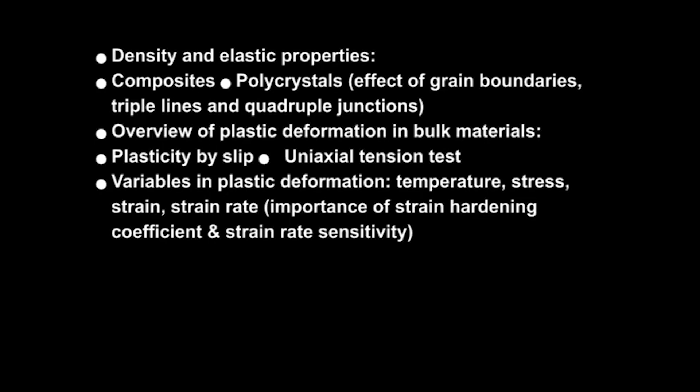In the discussion of mechanical behavior of materials, we will take up an overview of some of the properties, how they arise, the mechanisms behind these properties, and further we will try to discuss how these properties change when we go from the bulk to nanomaterials or nanostructured materials.

We will also take up issues regarding artifacts in testing, artifacts in the properties which we observe, and try to describe how we can develop better strategies of testing materials and also coming up with properties which are specifically peculiar to nanomaterials. Some of the properties we will be talking about are elastic properties, plasticity.

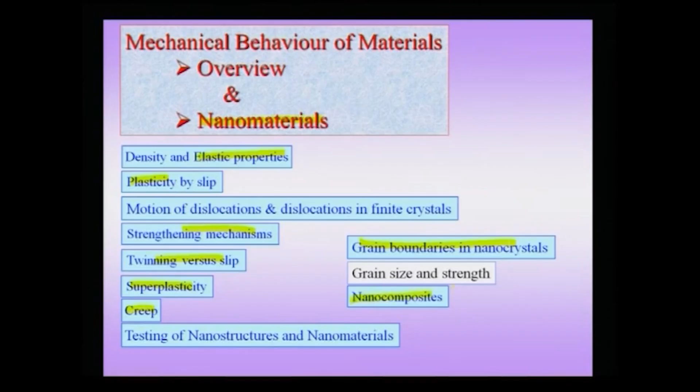We will also talk about strengthening mechanisms, the switchover from twinning to slip, important properties like superplasticity and creep in nanomaterials, and also the role of grain boundaries in nanostructured materials. In the whole process, we will also take up some hybrids like nanocomposites, which are a lot of research is being conducted in these areas nowadays.

So we will alternate between the basic property in bulk materials, the description of the property, and then take up specific properties of nanomaterials. Now, it is important to start with a broad overview of mechanisms by which a material can fail.

This can be mechanisms which are physical, there can be electrochemical, or they could have other origins from which failure can occur.

In this context, failure has been defined as a change in the desired performance, which could involve changes in properties and or shape. As we know, if there is a component like a gear wheel which is meshing into a system with other gears, then if there is a change in the shape of the gear, automatically this is constituted as failure.

Often elastic deformation is not included in failure, but it is obvious that suppose I have a springboard from which a diver is going to take a dive into a pool. If the springboard deflects too much, even though this would come under the class of elastic deformation, needless to say this would be a failure of the desired performance, and therefore it would constitute failure by elastic deformation.

The common other methods of failure would consist of plastic deformation, in which slip is one of the important mechanisms of plastic deformation, fracture wherein cracks propagate in the material leading to failure. Fatigue could be one of the reasons behind such a failure, and fatigue could also lead to cracking in the material. There is creep, and we will see that there are many creep mechanisms which can actually lead to failure.

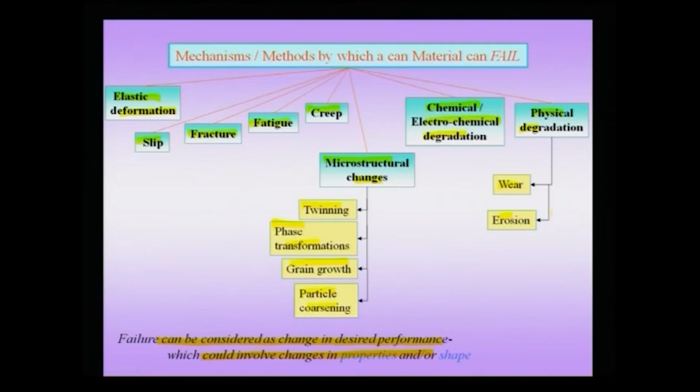Physical degradation like wear and erosion can also lead to failure, and this would be very important when you have two components in contact like the gear wheel, wherein surface wear could be an important property which we need to take into account. Suppose you are talking about a blade operating underwater which is propelling a ship, then erosion from particles in the medium could be a serious issue, and therefore that also needs to be protected against.

Having got a broad overview of the mechanisms by which a material can actually fail, we will take up some of these during the course of these lectures, wherein we will see how some of these properties have a beneficial effect when we go to the nanoscale, and therefore we can actually improve the properties when we work in nanostructured materials. Parallelly, we will also highlight some of the problems in using nanostructured materials, and therefore, putting together these problems and the advantages, we design strategies for improving the performance of materials and components.

The first property we take up is a physical property, which is density, but we take this up because this is closely related to some of the mechanical properties like the elastic properties.

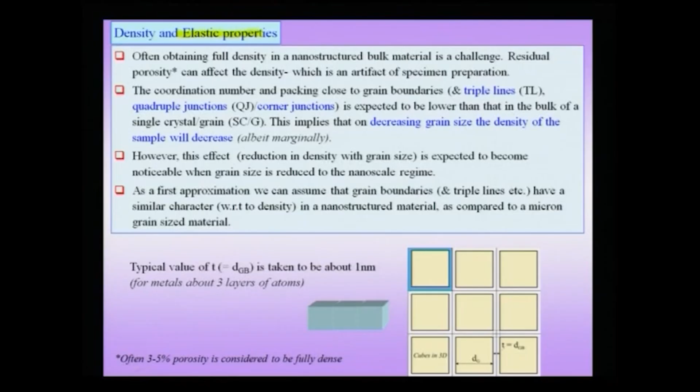Now, suppose I am taking a bulk material, then the fraction of grain boundaries in such a material and the fraction of what you might call triple lines is very small, and therefore, we can ignore them in terms of the overall contribution to the elastic properties. Of course, we cannot ignore grain boundaries when we are talking about plastic properties, and we will take up those important contributions later, but as far as elastic properties go, we can often ignore the grain boundary contribution.

The problem with nanostructured bulk material is a challenge, because often full density or close to the theoretical density cannot be obtained, and residual porosity can affect the density. So, in our arguments we always have to keep in mind that when talking about density of nanostructured materials, there could be an issue of porosity, and this porosity could drastically affect the properties, one of them being the elastic properties. And we would like to get rid of this artifact which is coming from the specimen processing or preparation.

Now, before we take up the elastic properties of a nanocrystal, it is important to note what is a grain, what is a grain boundary, and what are the higher order entities in a grain structure. Now, I can visualize that of course, you have a single crystal, then you have only one defect in the material, which is a surface.

Suppose I have a multiple grain material and I draw it schematically here, then I can notice that each one of these is a grain, and one grain can be differentiated from another. So, this is grain 1 and this is grain 2, one grain can be differentiated from another by the orientation difference across the grain boundary. Let me highlight the grain boundary by red lines.

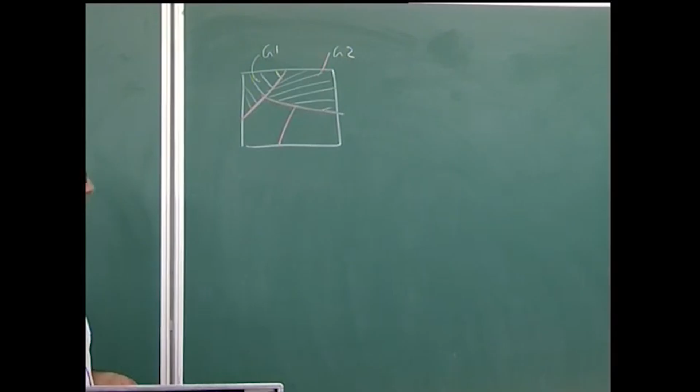Now, apart from these grain boundaries, there are higher order terms here, or higher order structural entities, like this, which you might call a triple line. So, in 2 dimensions of course, it looks like a point, but in the 3rd dimension this is a line, and therefore, this is a triple line.

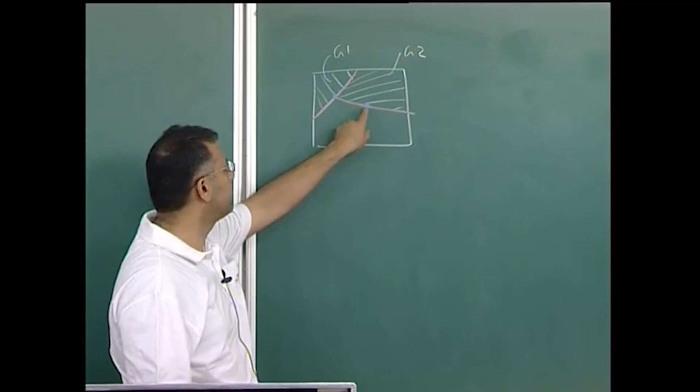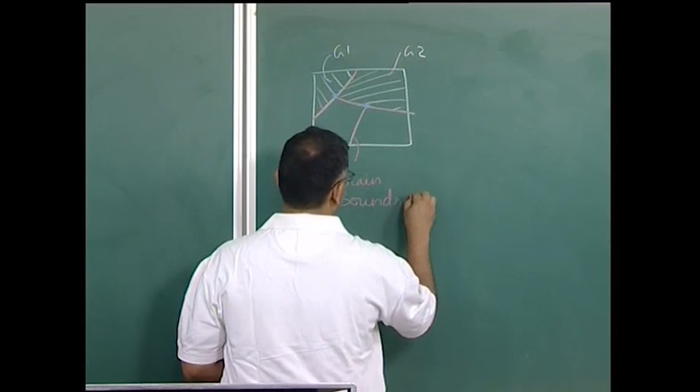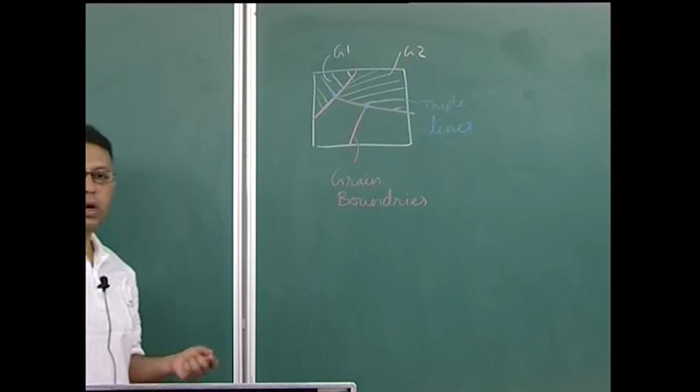So, you have grain boundaries and triple lines. Further, you can also conjecture that if 4 grains are meeting at a point, then that would constitute a quadruple junction.

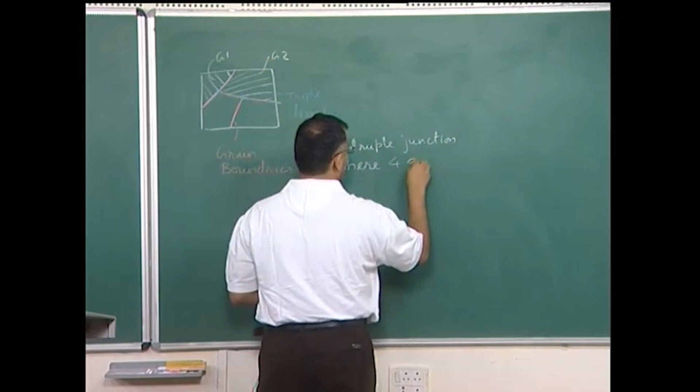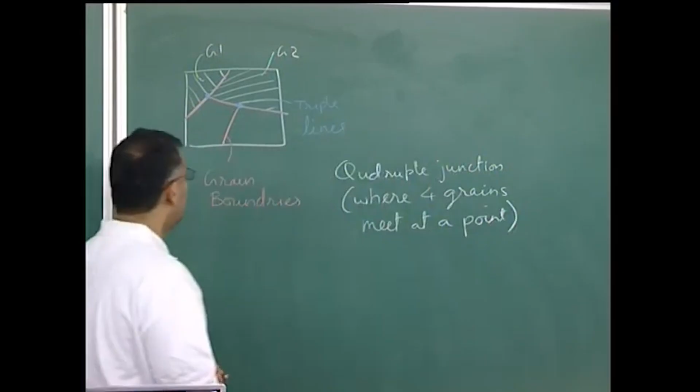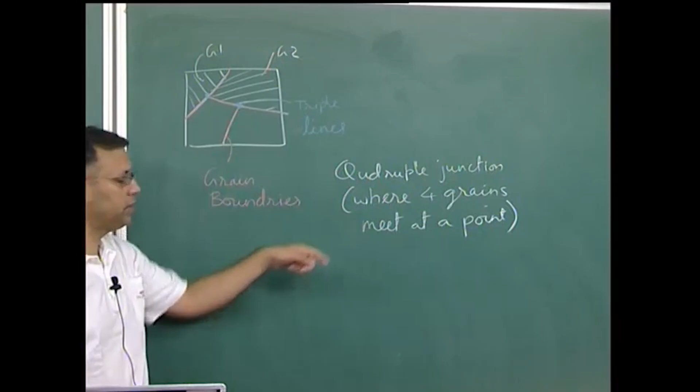And in terms of the energy and bonding, you can think of the grain interior being of the lowest energy, the grain boundary being of a little higher energy, the triple lines being of even higher energy, and finally, quadruple junctions being of the highest energy.

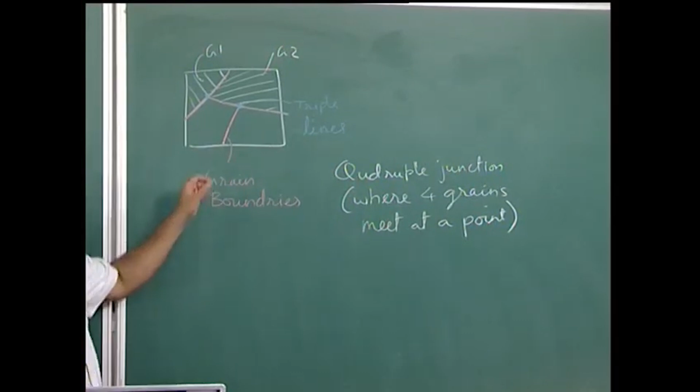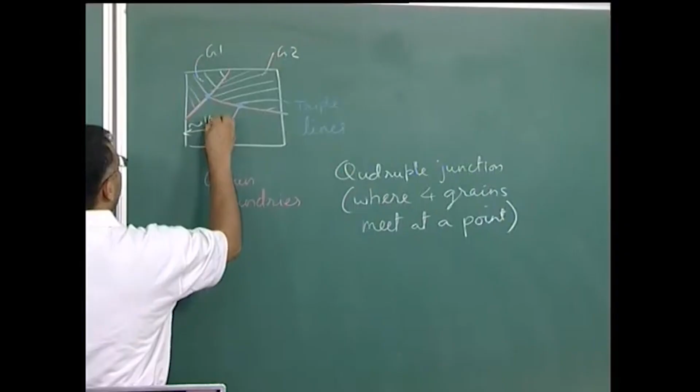If you take a bulk material, then the volume fraction of each one of them is going to be small and it can be ignored. But in a nanostructured material, when I am talking about a bulk nanostructured material, it means that the grain size is of the order of nanometers, say for instance 10 to 100 nanometers, and therefore in such a material, the effect of these on the density and elastic properties cannot be ignored.

Obviously, needless to say, their effect on plastic properties and fracture and other behavior also cannot be ignored.

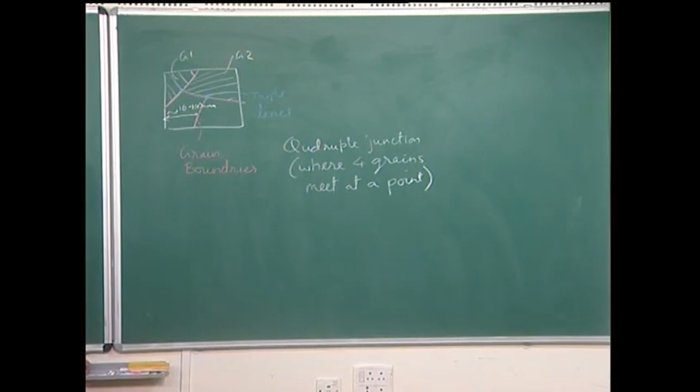Therefore, let us see how these entities affect density. The coordination number and packing close to the grain boundaries, which also includes triple lines, short formed as TL, and quadruple junctions, the QJs, which in literature are also called corner junctions, is expected to be lower than the bulk, or if you compare it to the single crystal. This implies that on decreasing the grain size, the density of the sample will decrease.

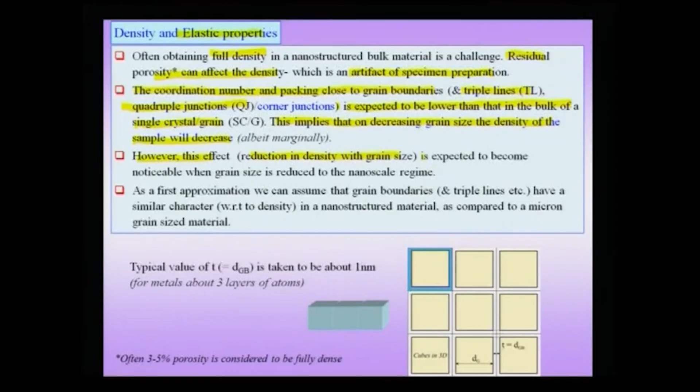Though this effect is expected to be marginal, not drastic, nevertheless, when you decrease the grain size, in other words increase the amount of grain boundaries and triple lines per unit volume, then you expect that the density would actually decrease for a polycrystalline nanostructured material. However, this reduction in density with grain size is expected to become noticeable only when the grain size is reduced to the nanoscale regime, and this is an important effect which shows its prominence only when you go to the nanoscale regime, as we shall see shortly.

Now, how to understand the effect of these? The way to understand is that we assume a certain grain morphology, and from that grain morphology we can assume that there is a distribution of triple lines and quadruple junctions, and we can therefore calculate the density based on the distribution of these.

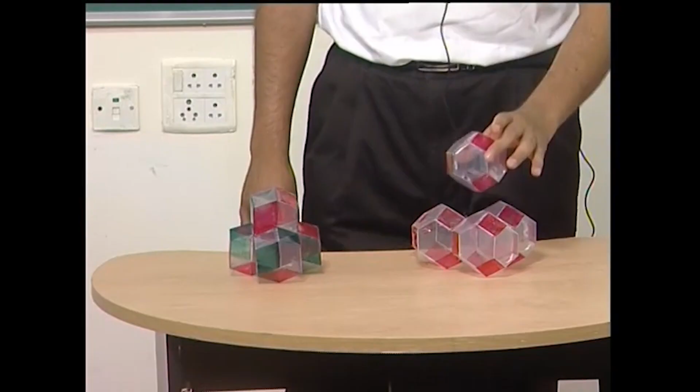One of the most common ways of understanding grain structure and grain boundaries, the way it is modeled, is to assume models of the form which I am showing here. You can see there are two kinds of standard packings of grain structures which are used. This is using something known as the tetrakaidecahedron, sometimes also referred to as Kelvin's tetrakaidecahedron, which is a space filling solid, and here I have something known as the rhombic dodecahedron, which is also a space filling solid.

Now, you can see how these rhombic dodecahedron and tetrakaidecahedron can monohedrally tile space, using just a single shape that can fill space. The reason for using these shapes is that this is mathematically easier to model, meaning I have a single shape and I can use the entire crystal, or the polycrystal, to be made of grains of this shape.

The difference in choice comes because this solid, even though it is a preferred choice for a grain structure, some people also prefer the rhombic dodecahedron because every face has an identical shape, which is a rhombus. In the tetrakaidecahedron case, there are two types of faces, a hexagonal face and a square face. Therefore, there are two choices classically used for modeling grains and calculating effective entities from grain boundaries and the mechanical behavior of grains.

But in the calculations, as we shall show now, we will use a different kind of shape for a grain, and this shape we are going to use is a cube. The reason for us to use a cube is to make it mathematically simple to actually calculate the various quantities which we are interested in.

As a first approximation, we shall assume that the grain boundaries have a similar character in nanostructured material. This is a very drastic assumption, but we will make the assumption that even though we are going to nanostructured material, the overall crystal structure of the grain boundary, the grain boundary widths, etc., remain very comparable or very similar to that in a micron size material.

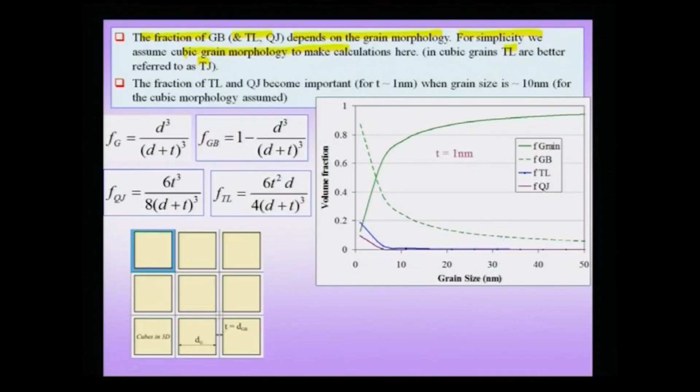The fraction of grain boundaries, triple lines, and quadruple junctions depends on the grain morphology. For simplicity, we have assumed a cube morphology to make our calculations very simple, and in cube grains, triple lines can also be referred to as triple junctions, as often done in literature. The fraction of triple lines and quadruple junctions becomes important when the thickness is about 1 nanometer, when the grain size is of the order of 10 nanometer or below, which we shall see very soon from the plots and the way we make the calculation.

The fraction of grains as a function of the size of the grain, shown here as d, and the size of the grain boundary, T, can be written as d cubed divided by (d plus T) the whole cubed. This is a pure geometrical calculation based on the cube morphology. Fraction of the grain boundary region can be written as d cubed over (d plus T) the whole cubed, 1 minus this value. Fraction of quadruple junctions can be given as 6T cubed divided by 8 into (d plus T) the whole cubed. The fraction of triple lines can be given as 6T squared d divided by 4 into (d plus T) the whole cubed.

Therefore, I have definite formulae for the fraction of the grains, the grain boundaries, the quadruple junctions, and the triple lines. If I plot these functions as a function of the grain size, you would notice that this main function, the fraction of the grain, seems to reduce as you go down to smaller and smaller grain size. So that means if the fraction of the grain is reducing, the remaining of the material is going to increase, which is now the fraction of the triple lines, the grain boundary, and quadruple junctions, which you can see are increasing.

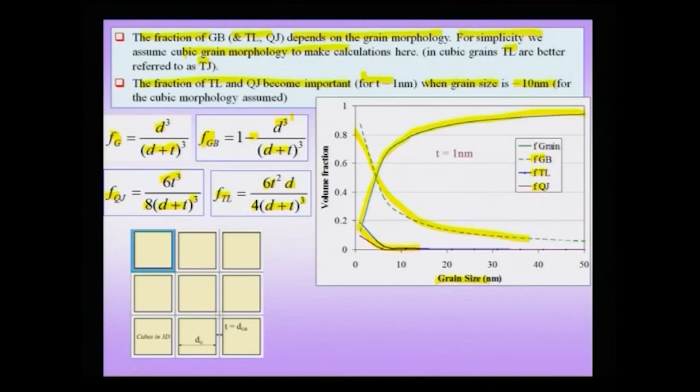The important point to note from this graph is that it is only below about 10 or 20 nanometers - I can draw some vertical lines around this 10 or 20 nanometer mark - that grain size effects start to dominate on these other entities of the crystal. That means if I am at a larger grain size, say about 50 nanometers, I can safely ignore the contribution of these to density, because the volume fraction is going to be small, so I can ignore them.

Now, what happens to these quantities when you are in the small grain size regime, which we already defined as less than about 20 nanometers? You notice that grain boundaries already start to play an important role when you are less than about 30 nanometers, while the importance of triple lines and quadruple junctions becomes very significant only when you are below about 10 nanometer. You can see that these functions start to dominate only in this regime. This is very important, because when you are talking about nanocrystalline materials with grains of about 10 nanometers, which are plastically deformed, you cannot anymore ignore the presence of triple lines and quadruple junctions, and they will play an important role in the plastic deformation of the material.

Before we reach that stage, we will of course talk about the elastic deformation of materials with these kinds of entities in them.

To summarize this slide and the lesson so far, with decreasing grain size, the importance of quadruple junctions, grain boundaries, and triple lines is going to increase. The grain boundary can be thought of as a 2D structure, the triple line as a 1D structure.

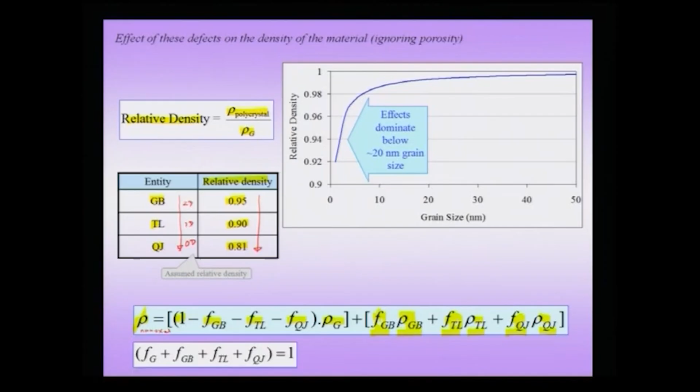Now, these numbers, of course, as I just pointed out, are not sacrosanct. They depend on the model, the material system, what you define as the grain boundary region, and how you calculate the density. But for now, we will assume some numbers to arrive at what you might call a qualitative picture of where we can see a change in relative density, which finally I want to correlate with the reduction in the modulus of the material.

We are actually ignoring porosity in this whole calculation, because if porosity is present, that is going to be the dominant factor as compared to some of these effects we are talking about. Needless to say, the fractions of all these put together have to add up to 1, from which we have actually calculated this number at the top.

Now, if I plot this relative density using these values for the grain boundary, triple line and quadruple junction, I notice that the relative density actually decreases with decreasing grain size, and below about 20 nanometers, this effect tends to dominate. So below about 20 nanometers, I have to worry about the presence of grain boundaries and triple lines in the calculation of relative density.

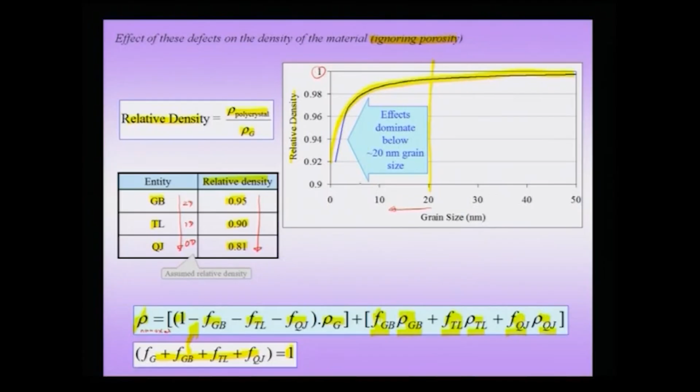That means, if the density of a bulk crystal is 1, then the density of a smaller grain size crystal is going to be about, say, 98%. That means about a 2% reduction in density has taken place purely from the fact that now I have a polycrystal in which there is a higher density of grains, grain boundaries, triple lines, etc.

So now I have a polycrystal, what you might call a porosity-free or artifact-free polycrystal, purely from the internal geometric structure which involves grain boundaries. There is a reduction in the relative density, and this relative density reduction can be pretty high as we go to smaller and smaller sizes.

So now what is the effect of this on the elastic properties? We will try to study that, and for that we will have to invoke the concept of elastic properties of a composite.

Because now I can think of my polycrystal as a composite between a grain and all the other structural entities we have just talked about. But before we go to that, let us talk about elastic properties of certain other nanostructures before we take up the elastic properties of the polycrystal we just discussed.

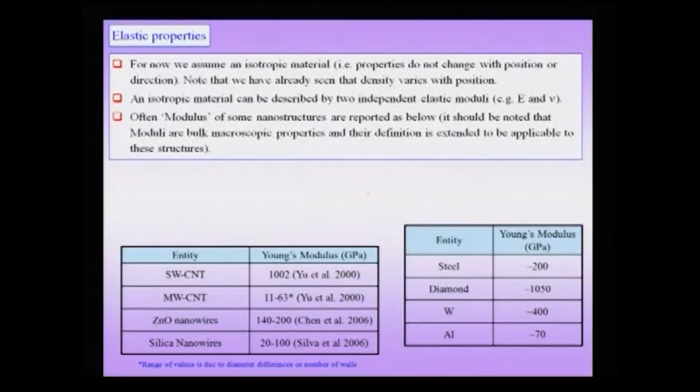There are some very interesting examples of nanostructures and nanocomposites, wherein elastic property seems to play a very important role. We will for a start assume an isotropic material, meaning the properties of the material do not change either with position or direction.

We know that for an isotropic material, we can describe the elastic properties using two independent constants, E and nu, or G and nu, and this makes our overall understanding pretty easy. The introduction of anisotropic properties, of course, brings richness to the system, but makes our understanding more difficult. Therefore, we will stick to isotropic properties for now.

For a cubic crystal, we know that you need 3 independent elastic moduli to describe the elastic properties, and if you go down to lower symmetry crystals, then you need more and more elastic moduli or elastic constants to describe the properties of an anisotropic crystal.

And this assumption is drastic, as we shall see, because we already noted that if you take a nano polycrystal, actually the density and therefore the modulus will vary from position to position. As you get close to the grain boundary, you expect a different modulus as compared to that in the bulk of the grain.

The modulus of some nanostructures are reported below. It should be noted that moduli are bulk macroscopic properties and the definition is extended to be applicable to these structures. So we should note that modulus as such a property is a bulk macroscopic property, meaning it is an average over a large number of atoms or a collection of atoms.

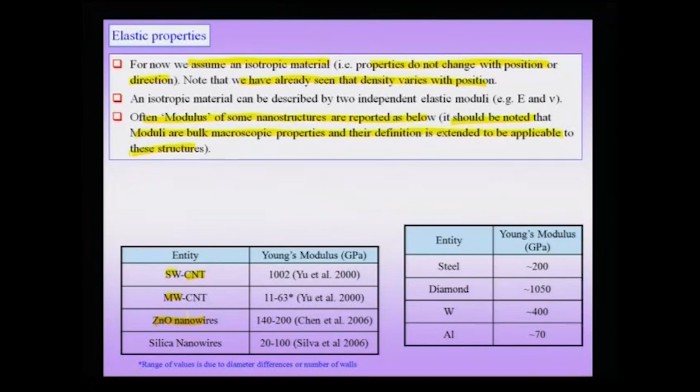And if I am describing the modulus of a small entity like a nanostructure, such as a carbon nanotube, which could be single walled or multi walled, or a zinc oxide nanowire, wherein the number of atoms is much more limited, then I am actually extending the definition of the bulk elastic modulus to some of these smaller entities. But nevertheless, having extended this definition, let us note the interesting properties we can get by working with these nanostructures. Some of the values reported in literature I am showing here below.

Silica nanowires have modulus variation in the order of 20 to 100 GPa, zinc oxide nanowires from 140 to 200 GPa, and multi-wall carbon nanotubes in the range of 11 to 63 GPa, depending on the number of walls. Single wall nanotubes have modulus values that are very high, approaching that of diamond.

Even though single wall carbon nanotubes can be thought of as folded graphene sheets, their modulus when pulled along the length can be very high, challenging that of diamond. This means I have an extremely strong entity, and people have even envisaged making ropes out of single wall nanotubes that can take a lot of load due to their very high modulus.

This means I can use it as a reinforcement in composites, and we call such composites nanocomposites, even though the grain size is not in the nano range - it is the reinforcement that is in the nano range, used to obtain very good properties.

Now, to understand the modulus of composites, we need to understand how, if I mix two phases, the overall modulus emerges. There are two ways of understanding this, and this depends on the state of stress in the composite.

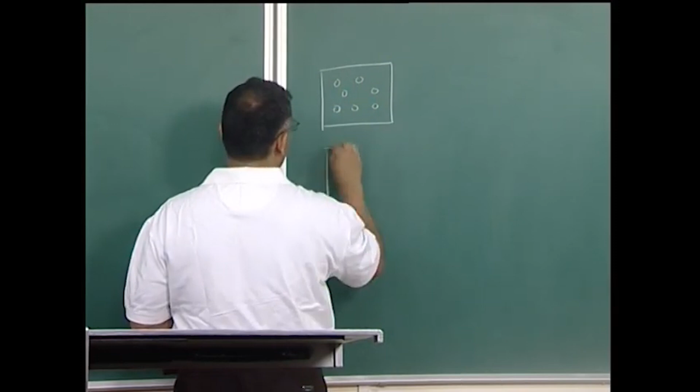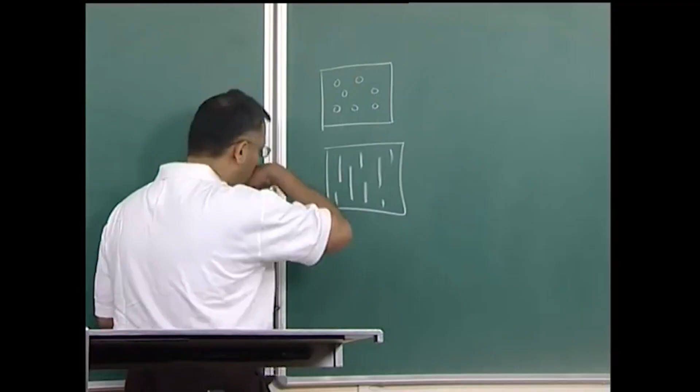Let me draw some schematics of composites. I could have a second phase in the form of spheres, or a composite with the second phase in the form of long rods, which could be aligned or in other forms, and we can also think of laminates. The important thing is the interface between the first and second phase, which I mark in red here.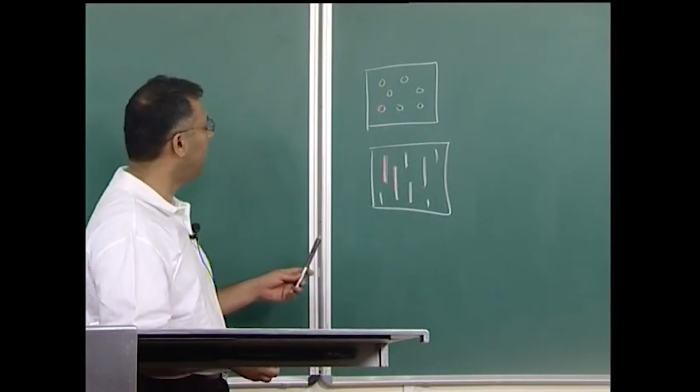It depends on whether this interface is transmitting all the strain, meaning it is in an isostrain condition, where the strain in the matrix is the same as the strain in the fiber, or the other extreme could be an isostress condition, where the stress in the matrix is the same as the stress in the fiber. In the case of isostress, we can think of the two materials.

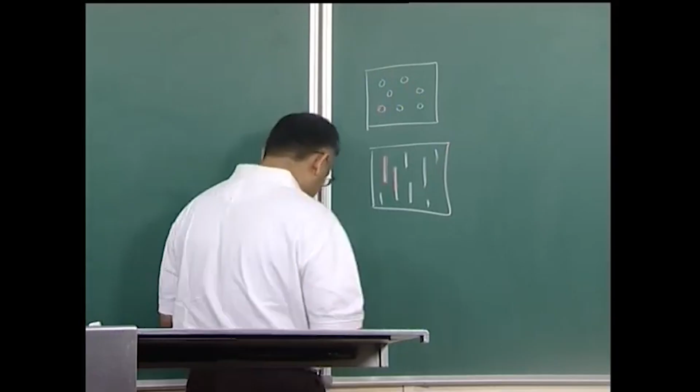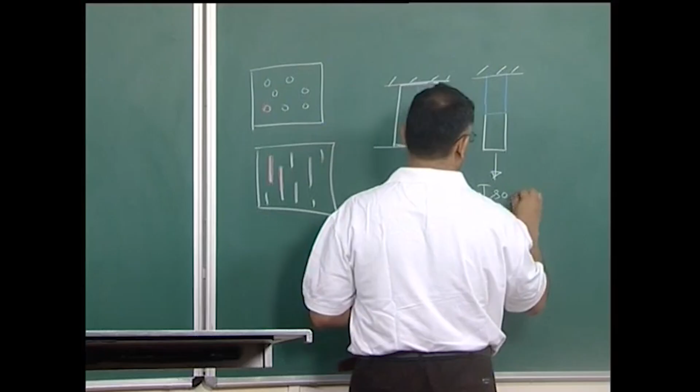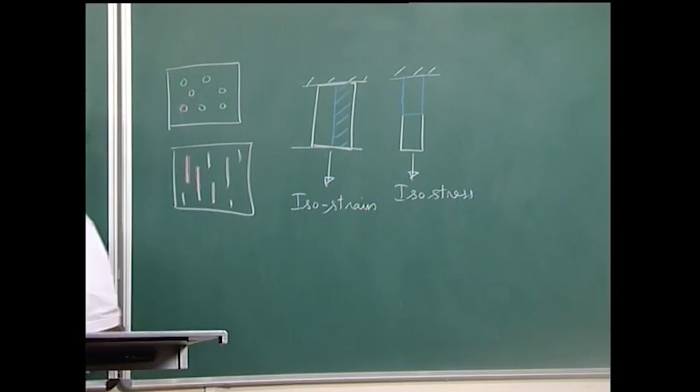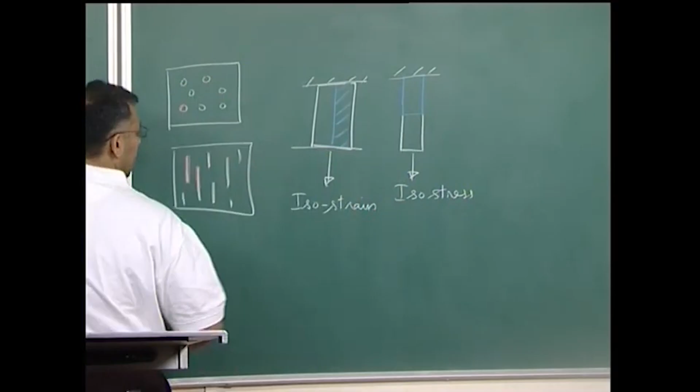Suppose this is material 1 and material 2, which I draw in two different colors. I can think of two configurations: the matrix and fiber materials in a parallel configuration, or the matrix and fiber in a series configuration. The parallel configuration is like isostrain, and the series configuration is like isostress, and using either of these I can calculate the modulus of the composite given the individual moduli of the fiber and matrix.

In the case of isostrain conditions, the strain in the matrix is the same as the strain in the fiber, which is the strain in the composite. I get the formula Ec equals Ef Vf plus Em Vm, where Vf is the volume fraction of the fiber and Vm is the volume fraction of the matrix, which is 1 minus the volume fraction of the fiber, assuming only two phases with no porosity.

This resistance in series configuration gives me the modulus of the composite. This kind of averaging is called Voigt averaging.

The other extreme is the isostress condition, where the stress in the matrix is the same as the stress in the fiber, which is the stress in the composite. This is like a resistance in parallel configuration, leading to the formula: 1/Ec equals Vf/Ef plus Vm/Em, where the subscript f refers to the fiber and m refers to the matrix. This kind of averaging is called Reuss averaging.

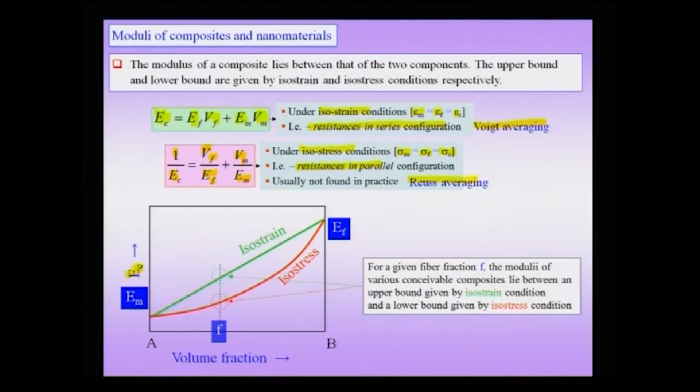Therefore, I have two extremes of the modulus of the composite with respect to the volume fraction of the material.

Suppose I take any given volume fraction f, call this f1. I have an upper bound given by the isostrain condition, which is the Voigt averaging, and a lower bound given by the isostress condition, which is the Reuss averaging. Therefore, my modulus of the composite is going to lie between the upper and lower bound.

The reason the real composite is not exactly one of the two is that the matrix-fiber interface could actually be partially slipping, or not contiguous in places. Not knowing fully the fiber orientation in each fiber and the characteristics of the interface, I can only say that the overall average has to be between the upper bound given by the isostrain condition and the lower bound found with the isostress condition.

Of course, in typical composites, you do not add up to 100% of the fiber. Usually the fiber concentration is between 5% and 25%, a smaller fraction compared to the overall matrix, though in exceptions we may go to higher volume fractions.

Therefore, for a given fiber fraction f, the modulus of various conceivable composites lies between the upper bound given by the isostrain condition and the lower bound given by the isostress condition. So if I am making a composite, the modulus benefit I get has to be between these two limits. The composite we will be referring to very soon is the nanocomposite, where we will be using a reinforcement in the nanoscale.

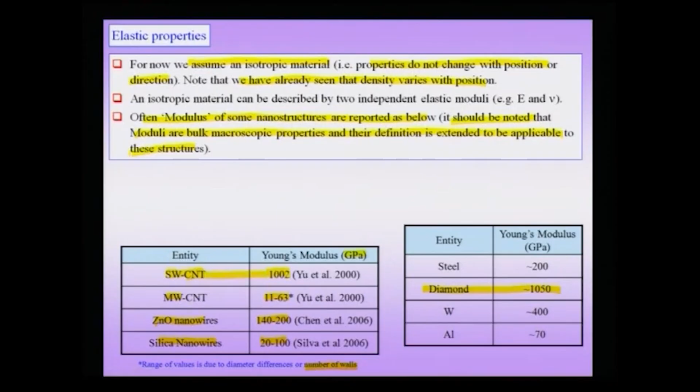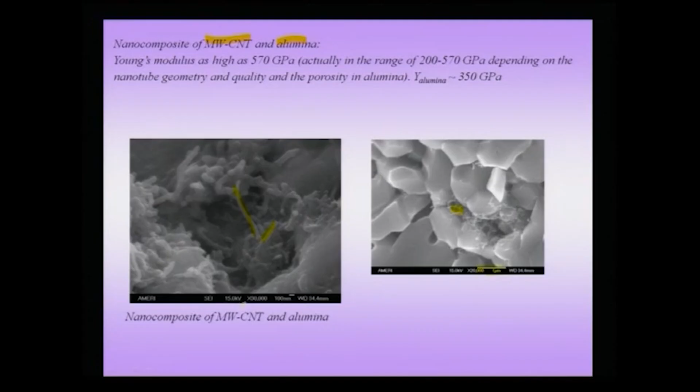The Young's modulus of such a composite has been found to be as high as about 570 GPa, with a typical range between 200 and 570 GPa. This depends on the nanotube geometry, its length, the number of layers in the multi-walled nanotube, the quality of the nanotube, and the porosity in the alumina. Since the Young's modulus of alumina is actually smaller, you can get a considerable benefit in modulus by adding a nanotube reinforcement to the ceramic.

This has also been found to give fracture toughness increment, which we do not deal with here, but it's important to note there are other benefits when adding nanotubes to alumina. This example of a carbon nanotube composite is an example of enhancing the modulus of the material by making a composite.

The reason for making a composite is that one or more properties see a beneficial effect compared to just the individual components. If I use just alumina or just carbon nanotubes, whatever properties I get, the composite gives an added beneficial property above each of the components. That is why I am justified in using a composite, even though some of these composites are difficult to process, synthesize, and use in routine industrial production.

Now, we are told that a nanopolycrystal can be thought of as a composite between grains and grain boundaries, triple lines, and other kinds of defects. To a first order, we can think of a nanopolycrystal as a composite of the grains and these other defected regions, which we saw have a lower density compared to the bulk of the grain.

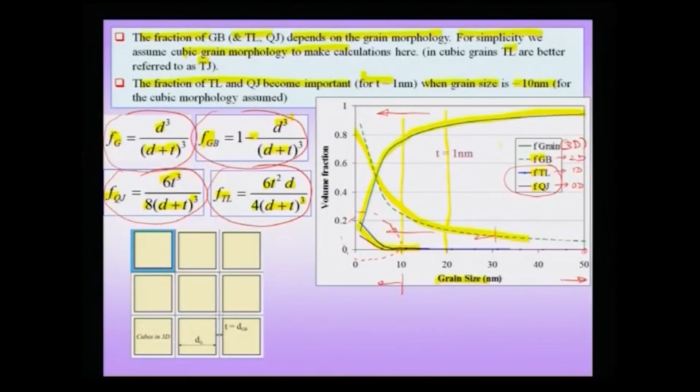Early results showed that there is a reduction in modulus below even about 200 nanometers, in the region where grain boundaries and other entities do not normally play an important role. But if you remember the slide from before, all the drastic changes seem to happen only below about 20 nanometers, not below 200 nanometers.

In fact, in the context of bulk modulus of a polycrystal, 200 nanometers can even be thought of as a bulk material—you can safely ignore most of the other entities like grain boundaries and triple lines. These samples' results were perhaps because of porosity, and the investigators did not characterize a fully dense sample. So in hindsight, these were not really fully dense bulk samples, and that was giving rise to the change in modulus below 200 nanometers.

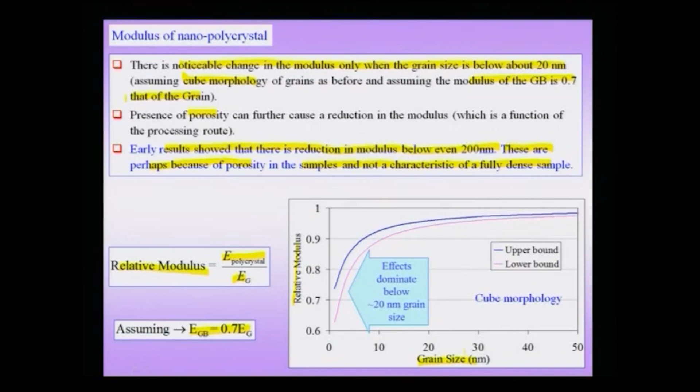Using EGB equal to 0.7 EG, and defining a relative modulus as E polycrystal over E grain—that is, the reduction in modulus with respect to that of a grain—if I plot the relative modulus with respect to grain size, I see that most of the changes take place around 20 nanometers or below. This seems to be the region where these other entities play an important role, causing a reduction in modulus.

Since I am assuming a composite, I have an upper bound and lower bound as shown here, the upper bound corresponding to isostrain and the lower bound corresponding to isostress. For a 10 nanometer crystal, for instance, I can draw a dotted line like this. The lower bound is about 0.9 and the upper bound is about 0.92 or 0.93.

Using my understanding of composites, I can calculate the modulus of a polycrystalline material, and I see that it is actually lower by about 10% when you go down to small sizes, about 10 nanometers or below. But again, synthesizing a porosity-free material at such sizes is difficult, and whenever porosity is present, it dominates the effect rather than these other effects I just described.

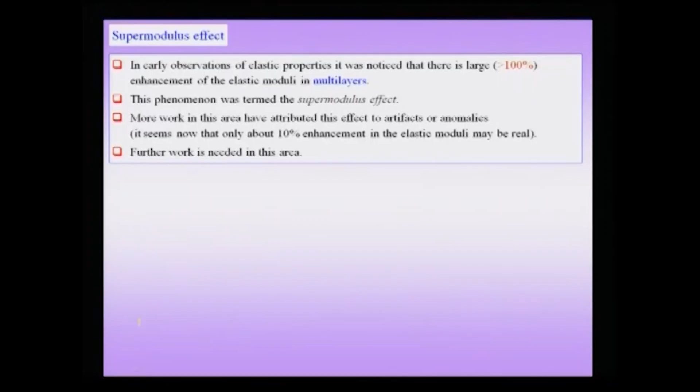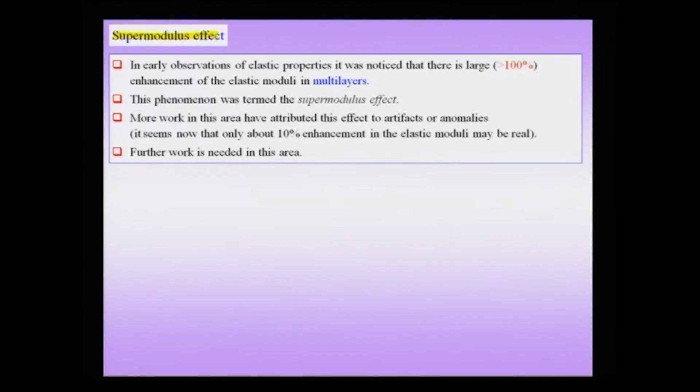There is another important clarification required, because in some old literature there is an effect described as the supermodulus effect, which caused a lot of excitement. These observations claimed elastic properties showing more than 100% enhancement in elastic modulus of multi-layers—thin film multi-layers—and they called this the supermodulus effect.

Later investigators could not confirm the supermodulus effect, and this work showed that it could be because of artifacts and anomalies rather than true effects coming from the multi-layer moduli. A reasonable assumption today would be that there is some enhancement in these multi-layers, but much smaller than the supermodulus effect originally described.

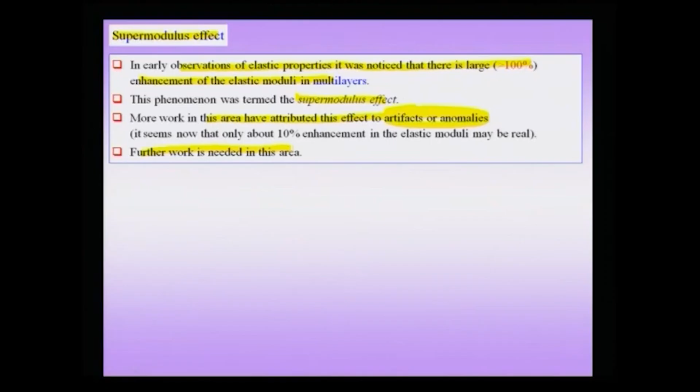More work has to clarify how general this trend of increment in modulus is—whether it is restricted only to multi-layers, or whether there are other effects to take into account. But clearly, the supermodulus effect is no longer attributed as a real effect in nanomaterials, and therefore it can be ignored.

The next topic we take up after elastic properties is plastic deformation of crystalline materials, and often slip is considered the most important plastic deformation mechanism. But there are other important mechanisms as well, and some of these become important, like twinning at low temperatures, especially in materials like BCC materials, wherein slip can be limited at low temperatures.

Additional mechanisms could be phase transformation, and here when I am talking about plastic deformation, I am implying that there is permanent deformation in the material. That means even in the absence of the load, there is a deformation which has been caused, which is going to be permanent. Therefore, phase transformations can lead to permanent deformation in the shape of a material.

There are creep mechanisms like grain boundary sliding, vacancy diffusion, and dislocation climb, and there are other mechanisms as well which can give rise to permanent or plastic deformation in a material.

Initially, we will of course start with slip, try to understand the role of dislocation motion in slip. We will also understand why crystals are weak, for instance in a tensile test, and then later on understand how the behavior of nanocrystalline materials and nano single crystals are different from that of the bulk materials, which we have been discussing.

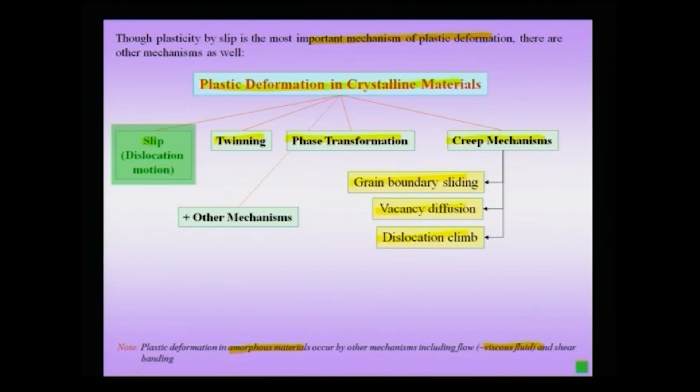So we are looking here at a broad overview of all the plastic deformation mechanisms in crystalline materials, but we will essentially focus on 2 or 3 of them: initially on slip, later on a little bit on twinning, and further down the lectures on creep mechanisms.

If I want to understand the plastic deformation by slip, the simplest test I can do on a material is what is known as the uniaxial tension test. When I perform a uniaxial tension test, I get what is called a load-stroke data.

That means I apply a load and I get basically some kind of elongation or increase in length of the material. Initially, this load-stroke data can be plotted as something known as an engineering strain versus stress plot, or it can also be plotted as a true stress versus true strain plot. There are 2 ways of plotting this data, and the way it is plotted can make the curves look very different.

Now, there are a lot of important properties you can actually calculate from this uniaxial tension test, which include the yield strength, the ultimate tensile strength, the fracture strength. Whenever the word strength is used in this context, it implies a fracture stress or ultimate tensile stress. You can also calculate the elastic elongation, the elongation to the ultimate tensile strength, and finally the elongation beyond which the material fails, which is called the elongation for fracture.

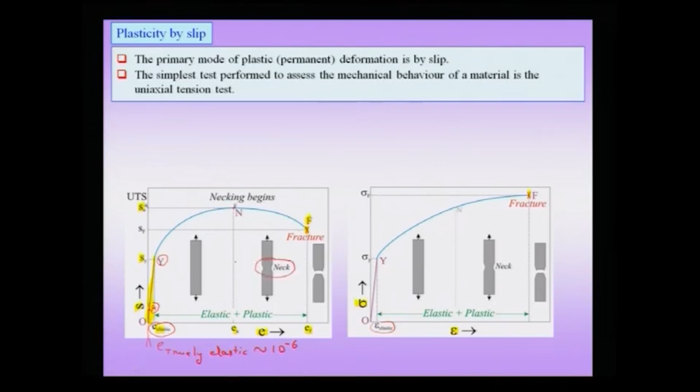Now, if I carry on my uniaxial tension test beyond point Y, the curve goes up in the engineering stress strain diagram and then starts to come down. This peak is where we attribute the formation of a neck, forming because there is localized deformation, meaning the deformation is not spread across the entire gauge length, L0. This localized deformation finally leads to fracture, and the material separates into two halves. In a ductile material, typically you observe a cup and cone fracture, and in extremely ductile materials you may even observe a rupture, wherein the specimen thins down to a point and then fails.

Now this blue region of the curve, though often casually called the plastic region, is actually elastic plus plastic, and that becomes obvious if I unload from a point like n or m here. If I unload at this curve, it will unload parallel to the elastic line, and I will get an elongation. Let me go down to the board and draw this again to avoid cluttering this diagram.

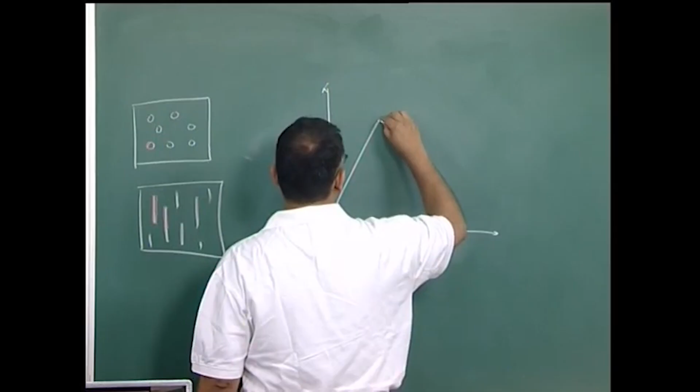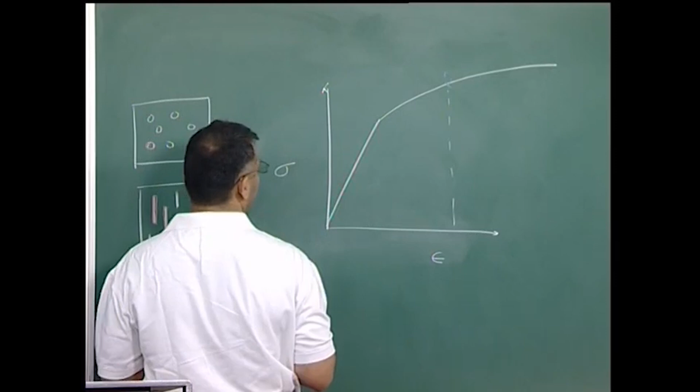So the elastic deformation I will exaggerate here, so it becomes easy to visualize the straight region of the curve. This is exaggerated; actually the slopes are of the order of gigapascal. Now if I unload from a point, say m, in the curve, I can draw a vertical line - this is now my true stress true strain diagram. I will unload from point M, and notice that the unloading takes place parallel to this line, the slope of these two lines being the same.

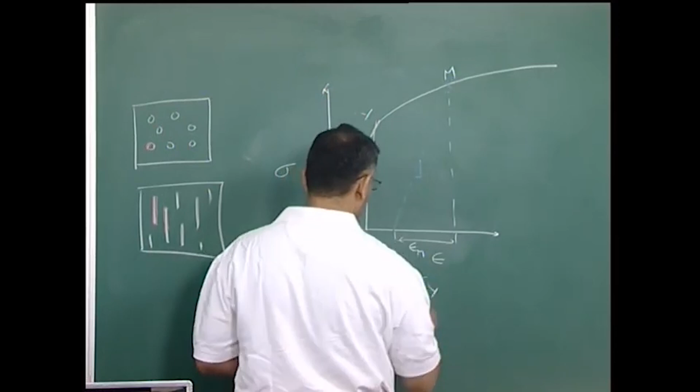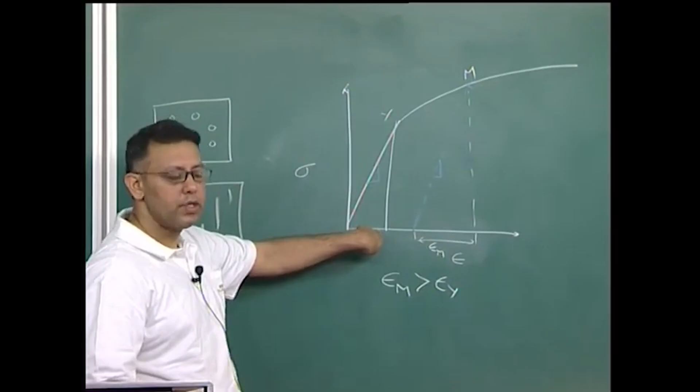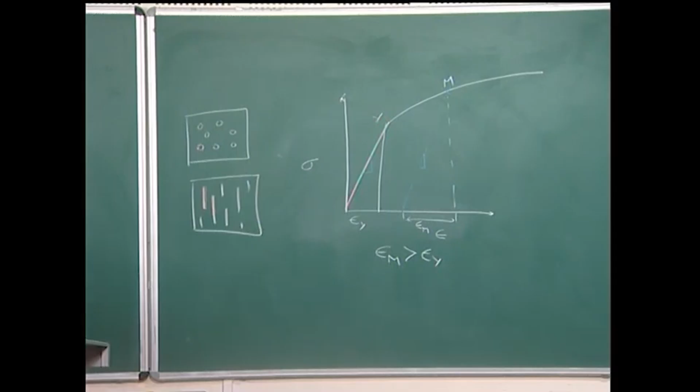If I notice, these are two similar triangles, and this implies that this blue region, by drawing similar triangles and unloading with the unloading curve parallel to the original elastic line, shows that I recover more strain here compared to if I unload from point Y. So in the sense of strain obtained, the so-called plastic region is more elastic than even the elastic region, and therefore I need to call this blue part of the curve actually elastic plus plastic, and not merely plastic.

There are a few things we need to ask, such as why this blue curve is going up. This phenomena, that the stress required for flow increases with strain, is called work hardening or strain hardening, meaning the material is getting harder and harder as I plastically deform it, until you reach a point like fracture. The reason, as we'll see ahead, is the motion of dislocations and the increase in dislocation density, with intersection of dislocations making dislocation motion difficult.

This is the result of what is known as a uniaxial tension test. To summarize the important points: there is a truly elastic region from origin O to point A. There is a linear portion which we call the macroscopically elastic region, but between point A and Y the specimen is actually microscopically plastic also. From Y to F, the material is undergoing strain hardening, which is nicely seen in the true stress true strain curve, wherein the curve is constantly going up.

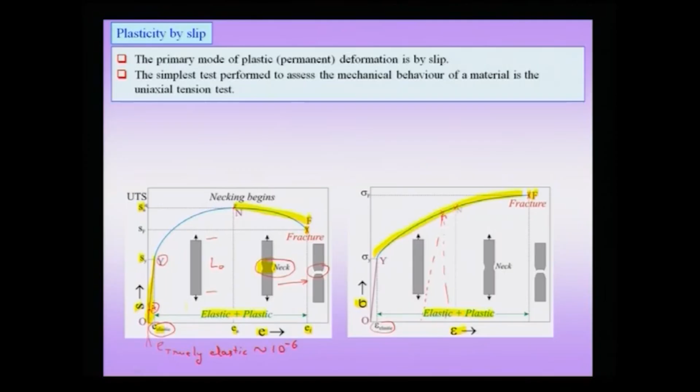There is a point N in the engineering stress strain curve, after which the curve starts to stoop down, and this is the point of onset of necking. That means the deformation is very local, and we will see later that the strain hardening exponent plays an important role in determining the amount of strain you get before necking. The overall ductility is dominated by a factor called n, the strain hardening exponent, which we will see later.

Now, what are the variables in a plastic deformation? We are getting a broad overview and general feel of the plastic deformation of materials, the details of which can be consulted in a basic course in the area. Stress, strain, strain rate and temperature.

Normally, the effect of strain rate comes into play only when you increase strain rate by a few orders of magnitude. If I am conducting a test at a strain rate of 5 per second and double it to 10 per second, this is not expected to affect many properties, including ductility or ultimate tensile strength. But if I increase the strain rate by a few orders of magnitude, from 10 to say 10 power 4, then I do expect the overall behavior of the material to change.

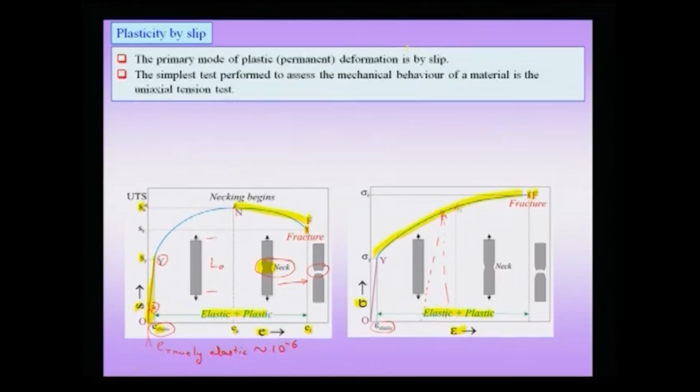Temperature is a very important parameter in plastic deformation, and when drawing curves like these, I am assuming the temperature is constant. That implies the stress-strain diagrams are typically at room temperature, and at elevated temperatures the behavior of the material will drastically change.

There are some standard empirical equations connecting some of these important variables in plastic deformation. At low temperatures, stress sigma, which is now true stress, can be written as a constant K into epsilon, the strain, power n. This is assumed to be conducted at constant strain rate and constant temperature. K is called the strength coefficient and n is called the strain or work hardening coefficient, or the work hardening exponent.

For copper and brass, n is about 0.5. That means this material can be given large plastic strain much more easily as compared to steels, which have a smaller strain hardening exponent.

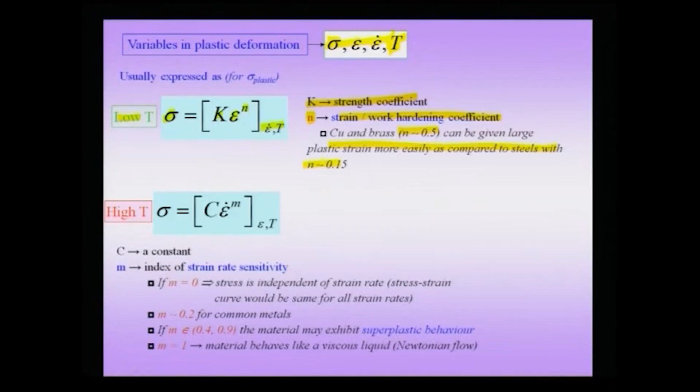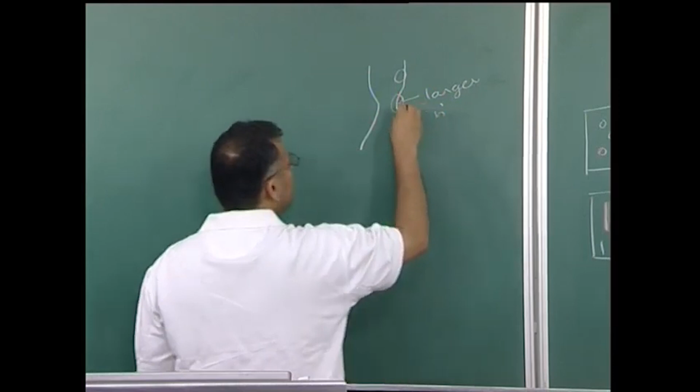This region has undergone more plastic deformation compared to this region, and with a larger n, this material will be harder compared to the other region. Because this region is softer, the plastic deformation will tend to spread here rather than get localized. Therefore, I will get more tensile elongation with a larger n. That is why a material like brass, with a higher strain hardening exponent of 0.5, gives more plastic strain in uniaxial tension compared to steels with a lower strain hardening exponent.

At high temperatures, we are talking about temperatures above the recrystallization temperature of the material. It is not strain which is the important variable, but strain rate which becomes important. I can write an equation for high temperature deformation as sigma equals C epsilon dot power m, and when doing these tests, I keep the strain and temperature constant for two specimens to have comparable values.

C is a constant and m is another important index called the strain rate sensitivity. This is very similar to n for low temperature tests. So at low temperature, the important variable is strain and the important exponent is the strain hardening exponent. At high temperature, it is the strain rate which is important, and the strain rate sensitivity is the important exponent.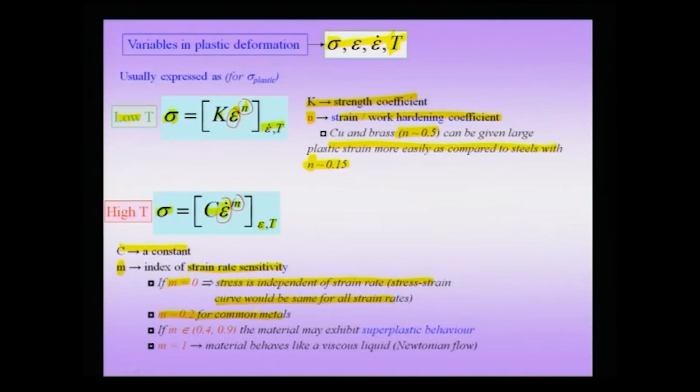If m has a large value, you would expect a behavior at high temperature similar to having a higher n in low temperature deformation. If m equals 0, the stress is independent of strain rate, and the curve would be the same for all strain rates. If m is higher, typically for metals about 0.2, the material would strain rate harden more compared to a material with lower strain rate sensitivity.

If m is in the range of about 0.4 to 0.9, the material may even exhibit superplastic behavior. We will see what superplasticity is and under what conditions we obtain it later, but essentially superplastic behavior implies getting very large elongations, of the order of 400%, 500%, or even 1000%, which is not seen for a normal material like steel or even aluminum.

That means strain rate sensitivity is an important parameter dictating the amount of elongation obtained at higher temperatures. If m is equal to 1, the extreme case, the material behaves like a viscous liquid or a Newtonian liquid, which just flows.

The effect of strain rate sensitivity is very similar to that of the strain hardening exponent at low temperatures. To understand this effect of strain rate sensitivity, we will delve a little deeper now.

We have already seen that stress can be written as C times epsilon dot to the power m, with the test being conducted at constant strain and temperature.

In some materials, due to structural conditions and high temperature, necking is prevented by strain rate hardening. As I told you about n at low temperature, its effect is to uniformly spread the deformation, reducing localized necking. A similar role is played by m at high temperatures, and we will try to understand how this happens.

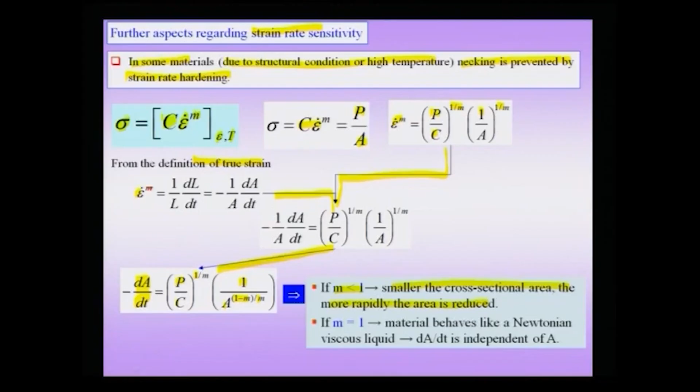If m is small, the smaller the cross-sectional area, the more rapidly the area is reduced. That means with a small strain rate sensitivity, smaller cross-sectional areas will decrease even more rapidly, which is not a good condition for obtaining long elongations. If m equals 1, it becomes like a Newtonian viscous liquid, but between small m and large m, we will try to understand this relationship better using plots.

From the previous relation, dA by dt can be related to A raised to the power 1 minus m by m.

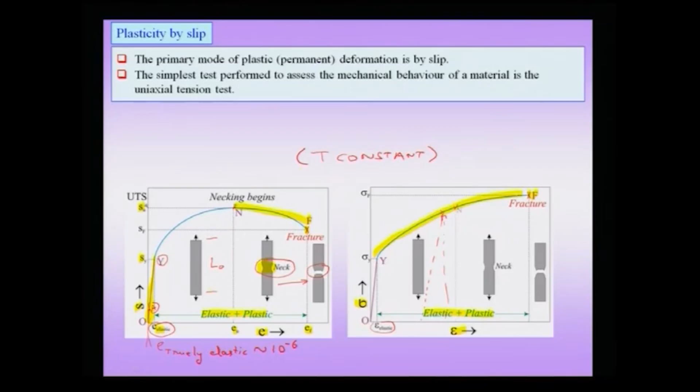The important variables in plastic deformation are stress, strain, strain rate, and temperature. At low temperatures, strain is the important variable. At high temperatures, strain rate is the important variable. That means I don't have to worry about net strain; the material does not accumulate strain. The material is constantly replenishing its microstructure such that at high temperatures, you don't have to worry about strain in terms of hardening. It's the strain rate which gives you hardening.

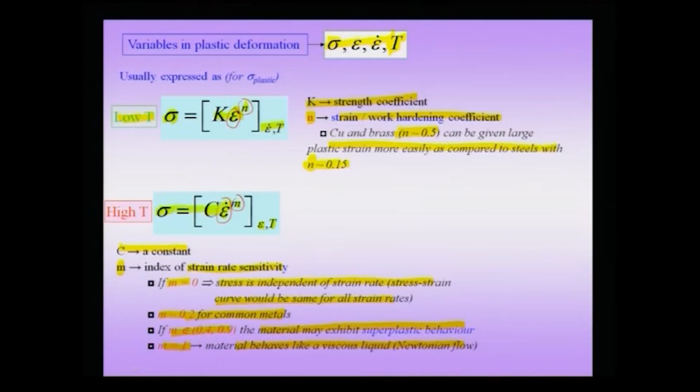Therefore, there are two empirical formulae commonly used in literature which give the connection between these variables: sigma equals k epsilon power n, where n is the work hardening or strain hardening exponent. At high temperature, you can write sigma equals c epsilon-dot power m, where m is the strain rate sensitivity.

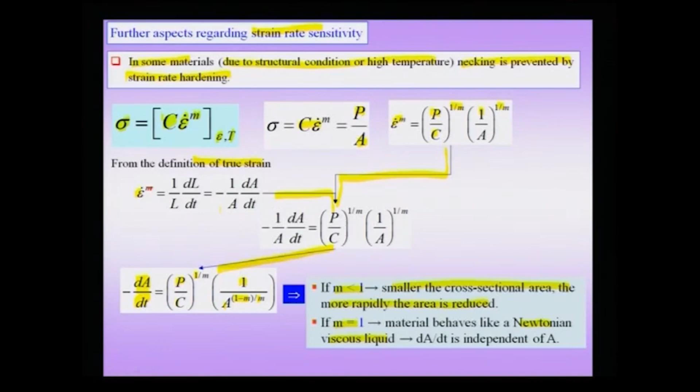If I want to study the effect of strain rate sensitivity, I can talk in terms of reduction in cross-sectional area per unit time. Looking at this, I'd have a curve for each material I'm studying, and for a given cross-sectional area, the reduction would be more for a material with low m compared to a material with high m. Therefore, the higher the m, the smaller the reduction in cross-sectional area with time.

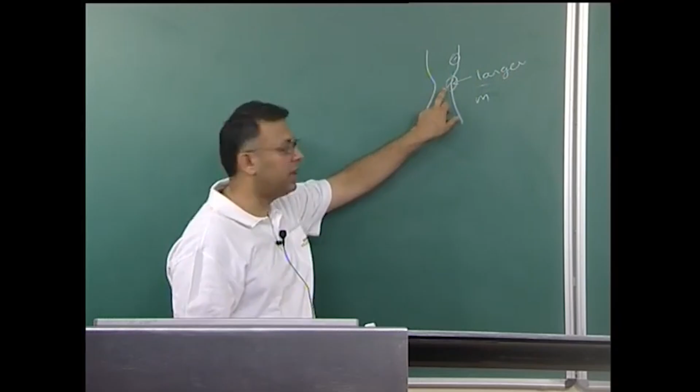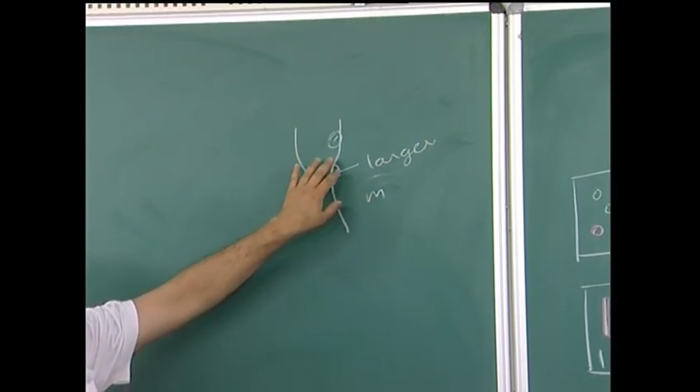That means, if necking is going to take place, there is a reduction in area, a dA by dt term here, and since there is a reduction here, the dA by dt here is going to be larger than the dA by dt where there is smaller reduction in area. This implies that region is going to get harder relative to this region if m has a high value, which also implies the necking would spread to other regions, or the deformation would spread to other regions.

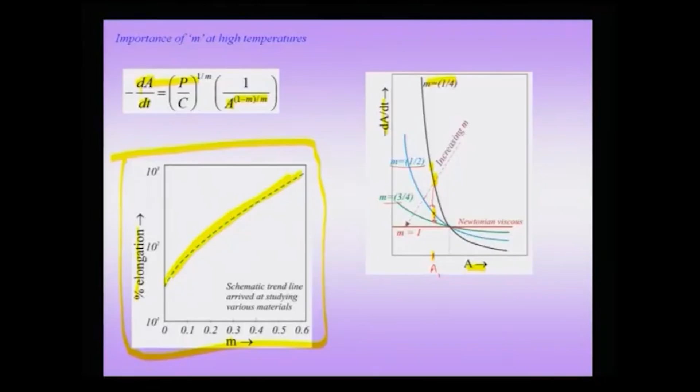That means I will get longer elongation, and therefore I can understand a schematic trend line which has been drawn here for these materials.